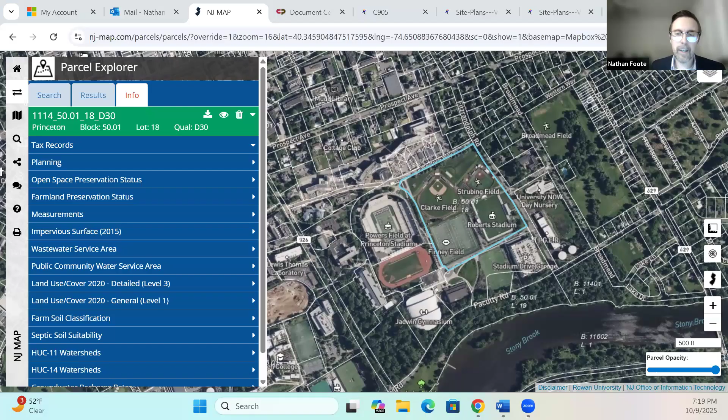So now turning to the previous applications, I'll zoom in a little bit to the site. The board has previously heard two applications related to the northern half of the subject property, the area occupied in this image by the baseball field to the west and the softball field to the east.

On February 14th, 2024, the university presented a concept plan to the board for a multi-phase project. During that hearing, the university's professionals indicated that phase one of that multi-phase project involved the demolition of the sports field and the installation of a geo-exchange field.

Phase two is construction of the Quantum Institute building, and that's the development application currently before the board that you're going to be hearing tonight. Phases 3 and 4 will be the computer engineering building and the aerospace engineering building. The university may talk about the phasing and timeline for those tonight, or not. But just for the board's awareness, that's the phasing plan that the university has presented previously.

So as noted, phase one of the multi-phase project involved demolition of the existing softball and baseball fields in this northern portion of the property, excavation of the site, and installation of underground geo-exchange wells and the associated geo-exchange piping. That was submitted to the board as an application. The site plan committee reviewed the application, classified it as a minor site plan, and recommended it for approval, which the board did. Final approval by municipal staff was granted November 14th, 2024.

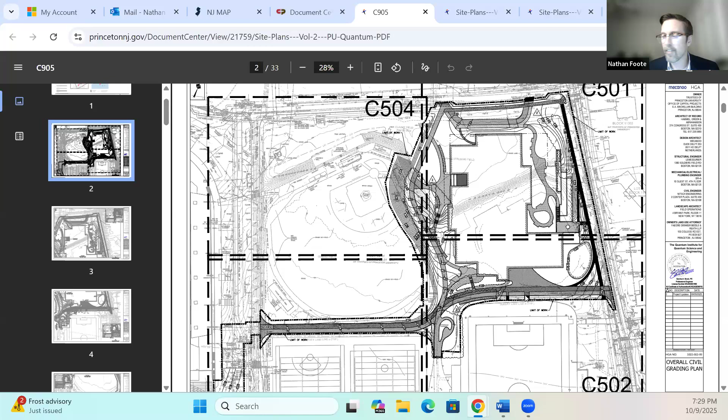And with that, I'll stop sharing, and that ends the summary of the application.

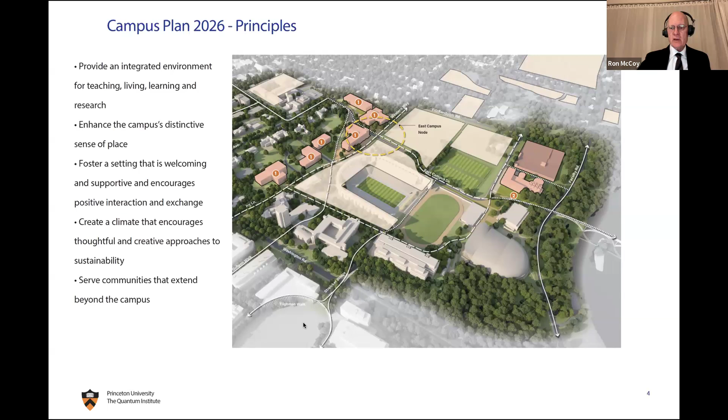Now we're on slide 5. This talks more specifically about the value proposition of the Quantum Institute project. The first bullet, as Christopher mentioned, is that this advances the GeoExchange goals of the university to achieve carbon neutrality by 2046.

We've learned that every time we have a construction project, we need to look at the site underneath as an opportunity for GeoExchange wells. On this project we have done that, and we are drilling the site beneath the project as a separate application for GeoExchange wells. There are some staff comments about whether those GeoExchange wells would interfere with the building. We'll get to those later, but the answer is no—that's a totally separate system. The laterals that connect the GeoExchange system are at the perimeter of the building and accessible, but the wells themselves are independent, and the building will not impact their functionality.

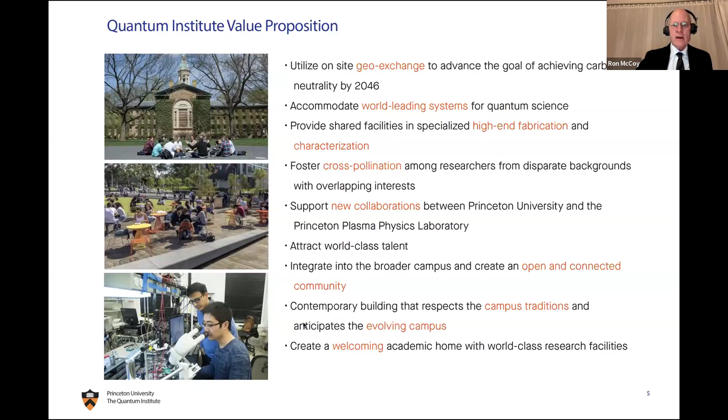All right, now we're on page 6. So now I'm going to tell you what quantum research is all about—but not being a quantum expert, I'm going to tell you what I read.

Princeton's quantum science and engineering efforts span foundational research and technological innovation. The Quantum Science and Engineering Graduate Program offers interdisciplinary training at the intersection of quantum physics and information technology, preparing students to be leaders in the emerging quantum industry. Princeton University has a deep legacy and a unique position in the field of quantum science. The quantum science journey at Princeton began in 1935 with Einstein, Podolsky, and Rosen's work on quantum entanglement theories. The university has since produced Nobel laureates and groundbreaking research. The Princeton Quantum Institute, also known as PQI, was launched.

Ron, could you explain the quantum theories of Einstein? What were they, entanglement? We'll get that later—that's a separate presentation.

The Quantum Institute initiative was launched in 2019, and it brings together 30 faculty from across the disciplines in physics, engineering, chemistry, computer science, and material science. This cohort of different researchers fosters collaboration across theory, experimentation, and application. The faculty are pioneering in quantum computing, architectures, quantum-grade materials, long-distance computing communication systems, and other emerging technologies and research.

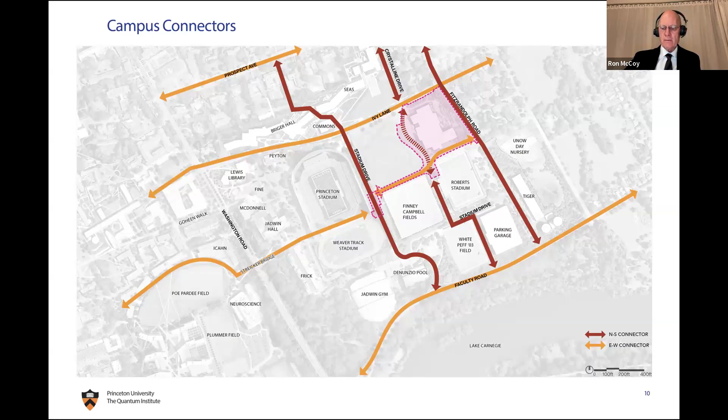We're not doing that at this time because we know we have future construction ahead of us, and that street will be destroyed with the future construction. So when those future projects are complete, that's when we will complete the shared shoulders along the complete street, which is Ivy Lane. I just want to say that the north-south connector is a pedestrian walkway that connects down to Faculty Road. All right, now we're on slide 11.

This one talks about the vehicular circulation in this area of campus. As you can see, around the site, the vehicular access only goes on the connecting road between Stadium Drive and Fitzrandolph Road. We call that a campus walk. It's a campus walk that's used by service vehicles and also by vehicles that need to access the loading dock. This is very typical on campus, that we have these kinds of shared drives, campus walks that are used for access for service vehicles and for loading docks.

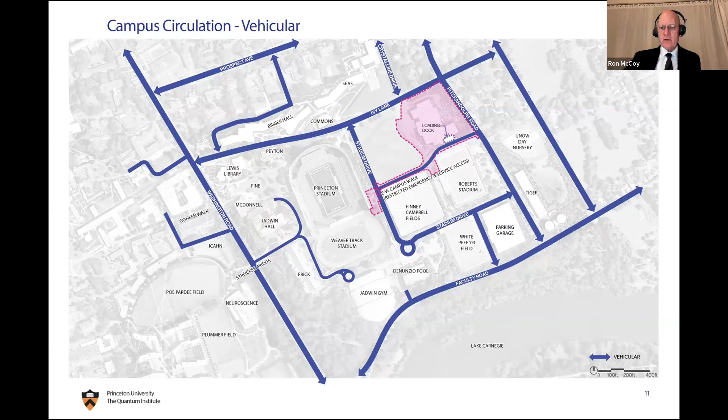Let me see if there's anything else I want to say about this one. All right, I'll get to the details now on the campus circulation.

This is drawing 12, showing the pedestrian circulation, with the more granular network of pedestrian paths that access the site. I mentioned earlier the tradition of campus walks serving as shared roads for access to loading docks and service. We have those commonly on campus: at Goheen Walk, on the walk between Icahn and Lewis Thomas Laboratory, accessing Whitman College, on the east side of the new residential colleges, and on McCosh Walk in the center of campus.

Traffic on those roads must yield to pedestrians, so pedestrians and bikes have the right of way. This addresses the comments made in planning board comment number 4 — that's a general comment about the use of that road.

However, planning board comment number 4 also asks us to clarify that the overall project is designed for 1,184 individuals and how they'll arrive to the building. Yes, it's sized for 1,184 occupants, and they will arrive via this network of pedestrian pathways. They'll park on campus in the overall system that Transportation and Parking Services manages, most likely in the new stadium garage, and use the pedestrian pathways to reach the building. There's no parking at the building.

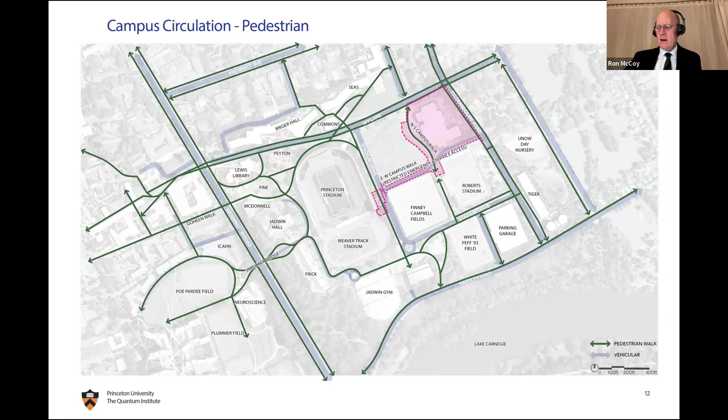All right, now slide 13. I'm going to use this slide to talk a bit more about several aspects of the questions and comments we received in the planning reports, in the staff reports.

Planning comment number 2 asks us to confirm the phasing and provide a timeline for future phases and the scales and dimensions of future buildings, and to clarify how the western portion of the site will be developed while awaiting those future buildings.

Let me address that first: the concept plan was a long-term vision. We do not have any specific target dates for construction of those facilities. We presented the concept plan to demonstrate that we're thinking about this building in the context of future campus development, but we've never put a time scale on that development. So whether it's a year or ten years, the site to the west of the Quantum Institute will be a temporary meadow, used for future academic buildings when we decide to launch those projects.

I'll also use this slide, which shows a bit of the floor plan, to address planning comment number 5, which asks us to clarify the proposed classroom functions of the building — specifically, will the labs on level A be used for lab classes or only for research, and will the auditorium on level 1 be used for undergraduate classes?

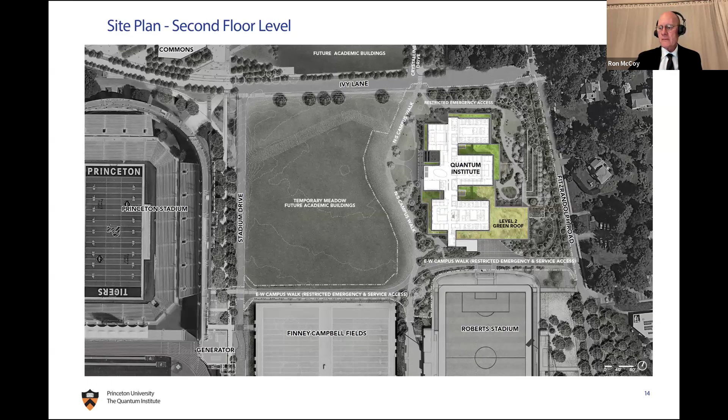All right, now slide 15.

I do want to point out there's one change in this slide from what we submitted yesterday or today. We've added an arrow here at the East-West Campus Walk, at the west end, just for clarification.

That's important because this East-West Campus Walk is two-directional for 95% of the uses. Only the large trucks that come about once a week, which cannot turn around in this loading dock, will head out to the east of the site and exit through a controlled gate, making a right-hand turn only when they hit Fitzrandolph Road. But service vehicles, small carts, and box trucks will be going both ways along that east-west campus walk, just as they do on the many campus walks I mentioned.

Emergency vehicles will have keyed access to that gate from Fitzrandolph, so they could either come via Stadium Drive from west to east, or come from Fitzrandolph from east to west.

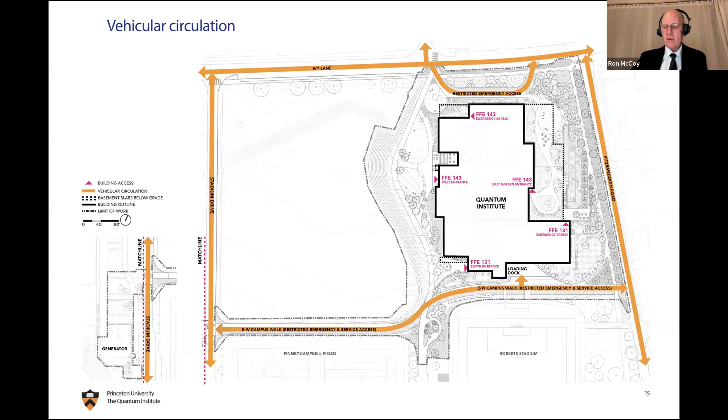Now I'm going to slide 16. This talks again about pedestrian circulation, and let me get to the comments here.

We were asked to address pedestrian safety in planning and engineering comment number 1. Pedestrian safety is, as on the rest of the campus, handled with these shared pathways—the east-west campus walks we have. They are sized in this new project at 12 feet or 8 feet typically to accommodate the kind of traffic, or 22 feet for the major one. The east-west campus walk is 22 feet wide. So these are sized to accommodate the kinds of traffic we anticipate, and they provide shared use paths that are safe throughout the campus.

I'll also point out on this slide, we'll talk about it more later, the drop of topography—you'll see the elevations shown here on this drawing. There is more than a 16-foot drop in topography from the northern side of the building to the southern side. You'll see a 12-foot drop in the finished floor elevations between the south entrance and the main entrance.

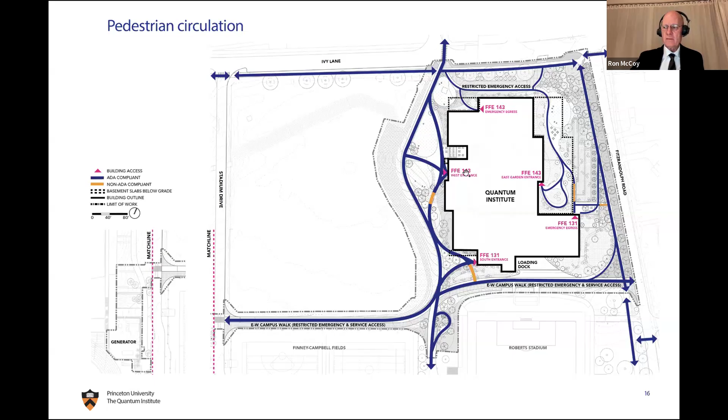Slide 17 here talks about bicycle circulation. As with the rest of the campus, the bikes and pedestrians will share the campus walks. As I just mentioned, the widths of the pathways are sized appropriate for this multimodal usage.

We have 88 bike parking racks provided, accommodating 176 bikes on the site. As noted earlier by Mr. Foote, they're primarily located on the western side where we expect all the arrivals to be. The quantity of bikes is extrapolated from our campus experience with buildings that have similar programs, similar ratios of laboratories, offices, student populations, and also the distance from the heart of the campus. We know that buildings further from the heart of the campus will have a bit more bicycle use than a building in the center of campus.

We're satisfying our bike requirements pursuant to Ordinance Section 10B-282.2D for institutions of higher education and learning. This is the applicable standard for this building since it's not a dormitory, and therefore interior bike parking, the distinction between long-term and short-term, is not required, and covered bike parking is not required. So that addresses planning comment 24, which asks us to address Ordinance 10B-282.2C—and as I said, that applies to dormitories, but not to academic buildings.

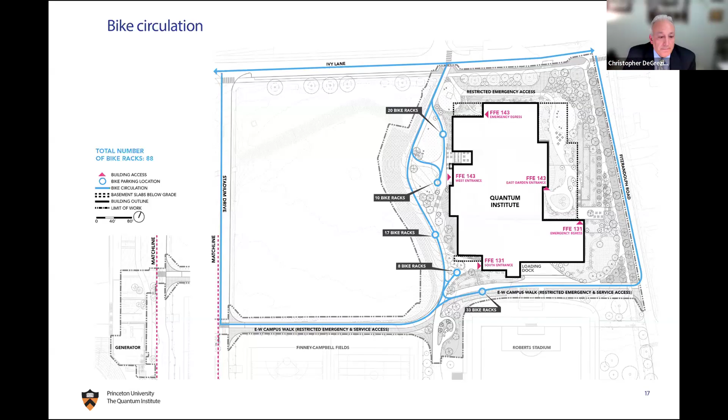All right, now on slide 18.

This addresses some of the comments I've already made about service and emergency access. It will be provided along that east-west campus walk at the southern side of the site, where we have widths of 22 feet using a 12-foot porous asphalt adjacent to a 10-foot wide grasscrete path. This is a strategy we've used at things like the new residential college, where we can provide footings for the outriggers of emergency vehicles along the pathway, but we can also plant grass and reduce the amount of impervious surface along that walkway.

That will continue from Stadium Drive all the way to Fitz-Randolph, and it'll bring vehicles to that loading dock, as I mentioned. And as I said, only once a week, longer trucks will need to go out through the eastern side. All other traffic will have to go out to the west to Stadium Drive, and that's obviously to prevent traffic from going into the neighborhood. And for those weekly trucks that do exit on Fitz-Randolph, they will be required to turn southbound, or turn right on Fitz-Randolph.

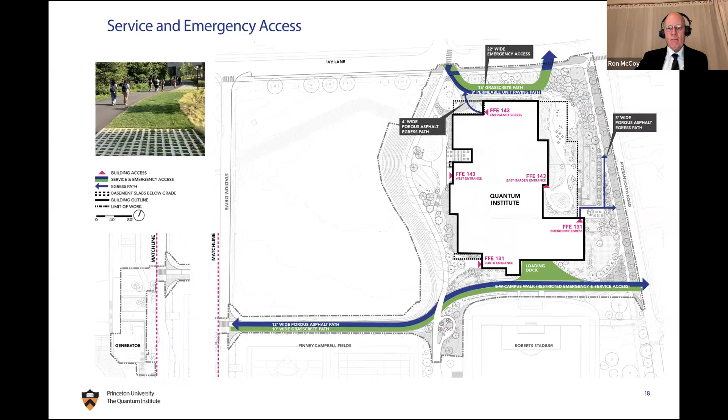This talks about site accessibility. As I mentioned a little while ago, there's a substantial slope across the site from north to south, about a little bit more than 16 feet. Thus, the main entrance at the west at 143 is a level above the entrance at the southwest corner of the site. And I should also use this drawing to indicate that a portion of level B below the building comes out to the perimeter of the building here.

So that's all under a green roof. So that green roof that I mentioned that serves as a setback to Fitz-Randolph -- part of that area has the laboratories underneath it.

The site, all the pathways on the site are fully accessible. There are indicated in orange here 2 areas on the west and 2 areas on the east that involve stairs and steps. But wherever there is a stair or step, there's a parallel or equivalent pathway for accessibility. So all the entrances at every corner, and this exit here at the east side, have accessible routes. On the east side, because of the stairs and the steep drop off to Fitz-Randolph, the pathways go to the north and connect to Ivy Lane.

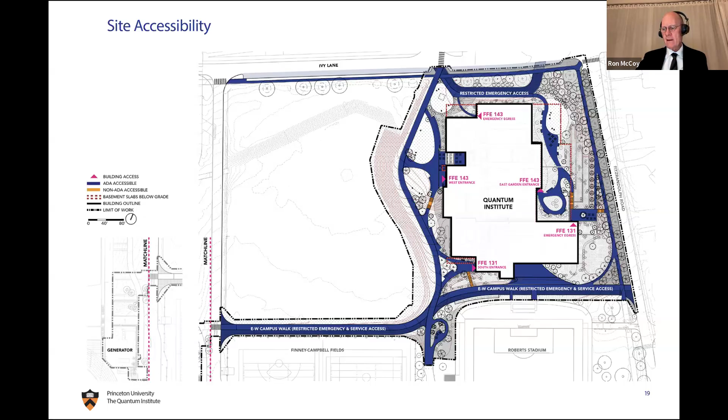All right, slide 20. I'm going to transition to Tsutomu here, who will talk about the landscape, but I just want to use this slide to introduce the landscape strategy, which is to recognize the different zones of the campus, different placemaking opportunities of the campus. And as Tsutomu goes through his slides, he will address everything here. So Tsutomu, why don't you take it away?

Just tell me when to change the slides. So Tsutomu, you were already sworn in, but we need to get you qualified.

Sure, so my name is Tsutomu Bessho. I'm a licensed landscape architect and director with Field Operations. We've been working on multiple projects with Princeton University over the past 7 years. I have a Bachelor of Agriculture from University of Tokyo and a Master of Landscape Architecture from the University of Pennsylvania. I've been practicing landscape architecture for over 19 years, and I'm registered in New Jersey and Pennsylvania.

And your New Jersey license is current. Yes. Thank you. We'd like you to present -- we accept your qualifications. Thank you.

So this is slide 20. As I mentioned, I will walk you through the places we are proposing around the building, including North-South Campus Walk, East-West Campus Walk, Woods, East Gardens, Structured Gardens, and Streetscape. Next.

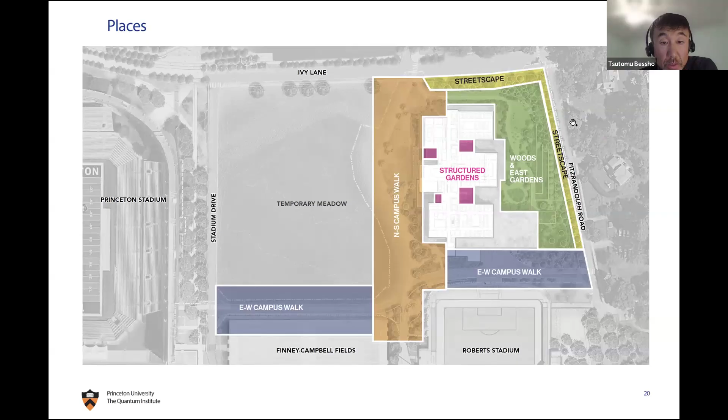Slide 21. So starting with the northwest corner of the building, we are proposing a series of lawn areas along the North-South Campus Walk to create the open and inviting landscape for the west entrance, which is a primary entrance to the proposed building. Next.

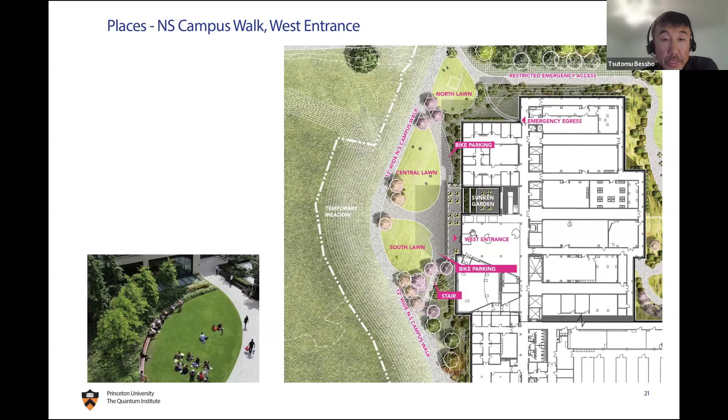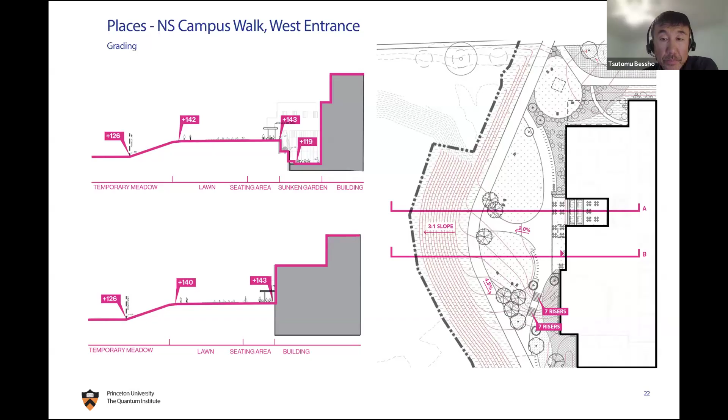We are also providing a good number of bike racks near the entrance where demand for bike parking is high. 30 bike racks in total are proposed for this entrance, and each rack will accept two bikes, correct? That's correct, so 60 bike parking spaces for this area.

I want to hand over to Ron to speak to the future campus art proposed at the corner of the building. Christopher, you may help us here. We have identified a hypothetical site for campus art. We have not selected that artwork, but we want to include it in the proposal in the application. Our strategy is to request that approval of the art be deferred to the landscape subcommittee later, or municipal staff.

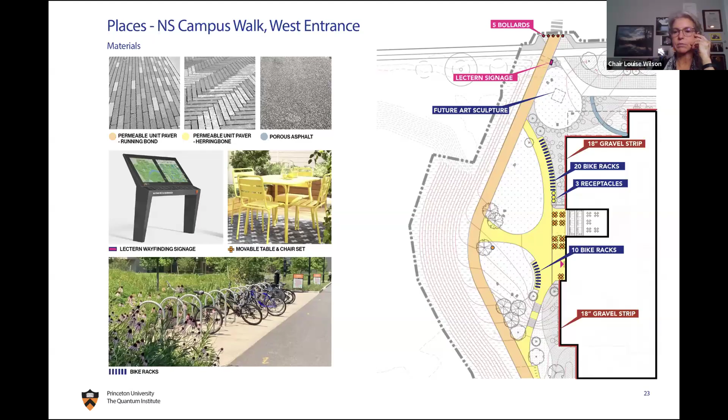The area west of the north-south campus walk, shown in orange, will be meadow, very similar to what we just planted at the Meadows campus in West Windsor. Lastly, an 18-inch wide gravel strip will be installed in the planting beds all around the building to address the new fire code.

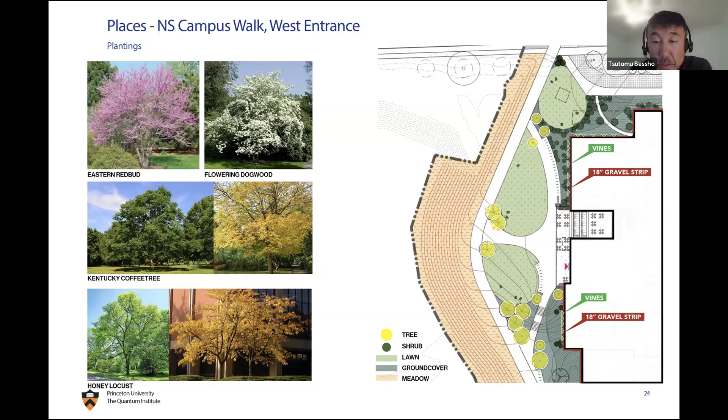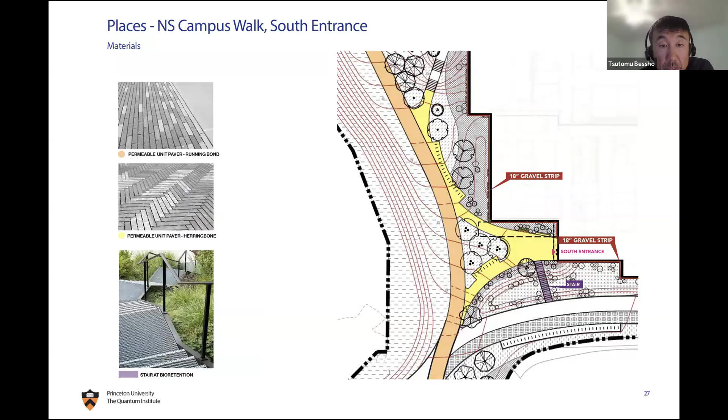Because that type of sign isn't really contemplated by the municipal ordinance, we're requesting a variance for it. A similar sign is on the north side as well—this one is on the south side of the path. As you follow the walk up, there's another one of those proposed to orient people and give them information on where they are and how to get to where they want to go.

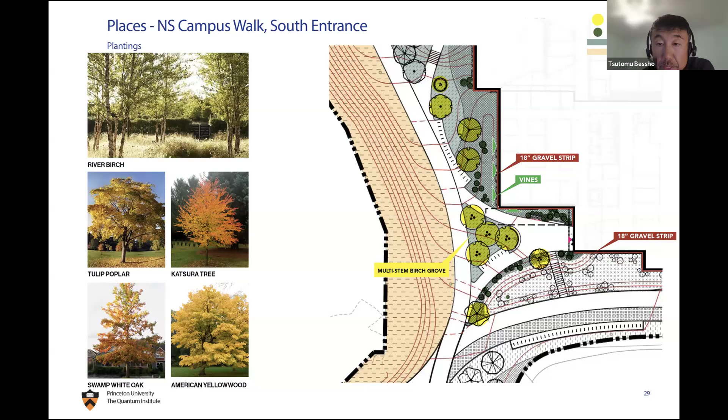Proposed planting: multi-trunk river birch trees are proposed to create the grove, and tulip poplar and katsura trees are proposed at key locations. Other proposed tree species include swamp white oak and American yellowwood. The planting beds are filled with shrubs and ground covers in the same way as the area to the north.

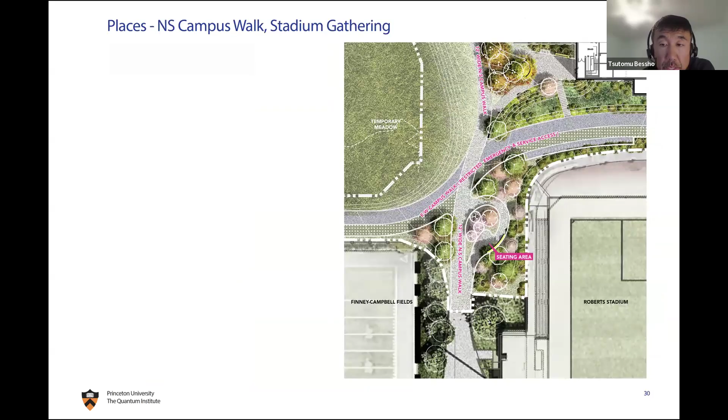This is slide 30. Moving further south, we are creating another small gathering space by reshaping the plaza built for Roberts Stadium.

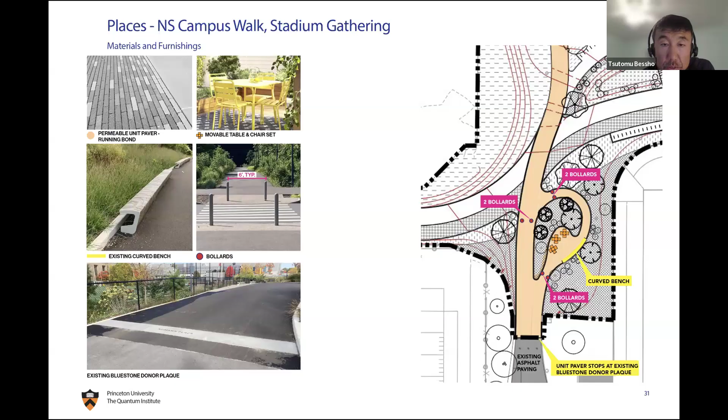Next, slide 33. I'll turn it over to Ron to talk about the East-West Campus Walk. We've talked about this a little already, but this responds to planning comment number 22, asking us to clarify if there will be a traffic restriction device at the southern access drive from Stadium Drive, referring to this intersection. The answer is no. As I pointed out earlier, there will be signage that says this is restricted access, because we need to get service vehicles and carts to the loading dock. With the exception of the large vehicle that comes weekly, everybody will also go out in that direction, so we don't imagine there'll be any functional benefit to having a restricted device at that intersection. It'll be more common on campus to have that open for vehicular traffic.

And then we have an exit-only gate here, as mentioned, and a right-turn-only southbound on Fitzrandolph to stay away from the neighbors.

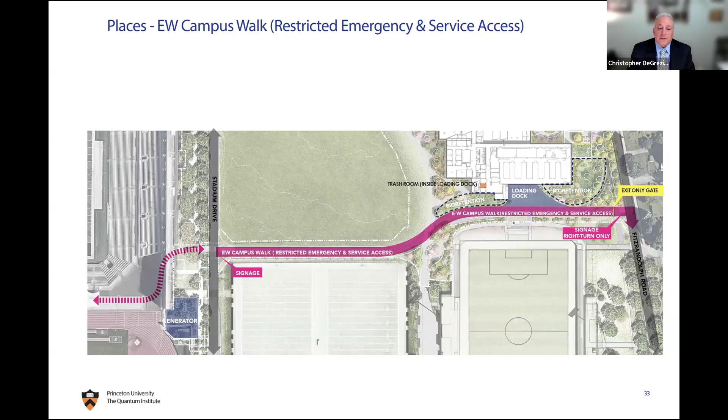The next slide, 34, proposed paving materials and furnishings for the East-West Campus Walk. The north half of the walk will be paved with porous asphalt shown in blue, and the south half will be paved with grasscrete shown in green. As Ron mentioned, grasscrete is basically concrete paving with voids that can be filled with either grass or gravel. We've used this material for a few projects on campus, and it's been very successful in reducing the scale of the hardscape. As Ron mentioned, a gate will be installed at the east end of the walk, and signage will be installed at the west end to control vehicular traffic at each location.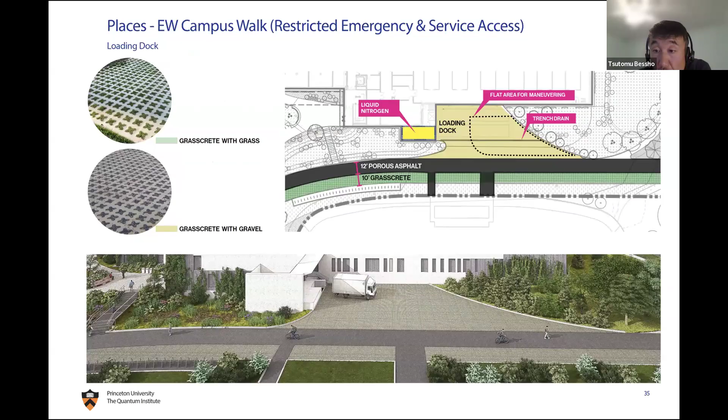Next, slide 37, zooming into 3 bioretention basins located between the building and the East-West Campus Walk. As previously mentioned, there will be 1 basin at the southwest corner of the building, and 2 more bioretention basins at the southeast corner with 2 different levels as shown in the section. These 2 basins are more visible to the public, so they bring a great opportunity to showcase what the university is doing for stormwater management.

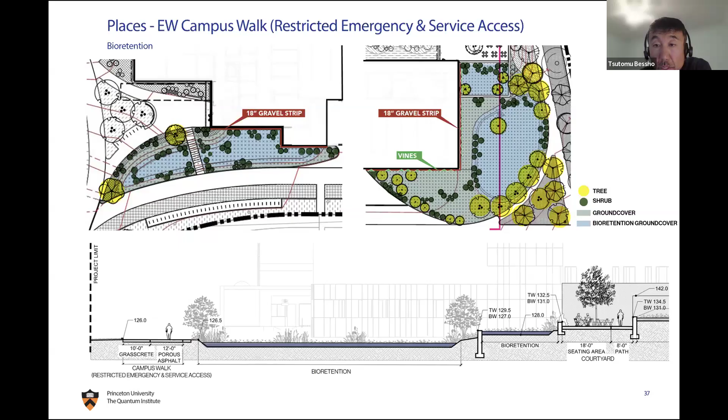Next, slide 39. Moving on to the east side of the building, this area contains various types of landscapes, including terrace, courtyard, grove, and woods, along with level changes, so it will be a very interesting space to walk through as well as to look at from the street level.

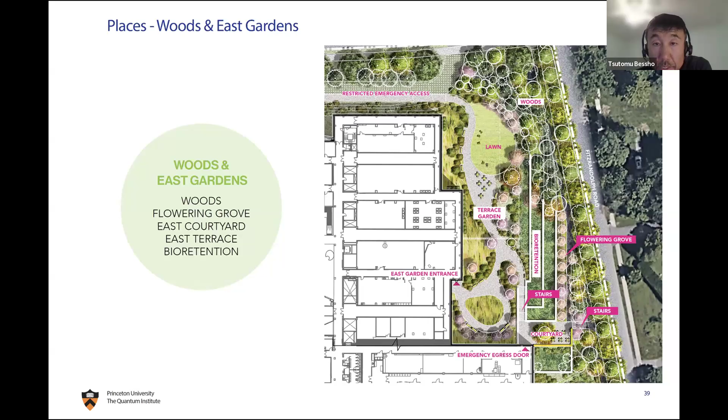The next slide, 40, shows the east-west sections illustrating the level changes in this area. As you can see, the terrace is basically the green roofs, as Ron said, and the terrace in front of the building is at a higher elevation than the street level. There will be a terraced bioretention basin between these 2 spaces.

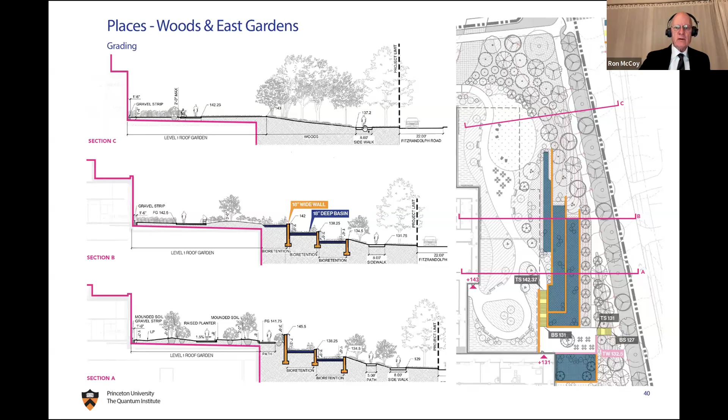Let me point out, as may be clear in this section, that this fuchsia colored line is the roof of the building below, the laboratories below. You see the green roof here, and then it terraces down to the Fitz-Randolph Road and the walkway sidewalk. It's continuous when you're on the ground, so you don't realize the building is there—just the building underneath the garden.

Slide 42, proposed planting. This area will have various types of planting, including canopy trees, understory trees, and shrubs to create woods at the northeast corner of the site, flowering trees for the grove along the terrace bioretention basins, and a symbol tree for the courtyard at the southeast corner. This tree is the Katsura tree, one of the non-native species we are specifying. The bioretention basins will be densely planted with shrubs and ground covers.

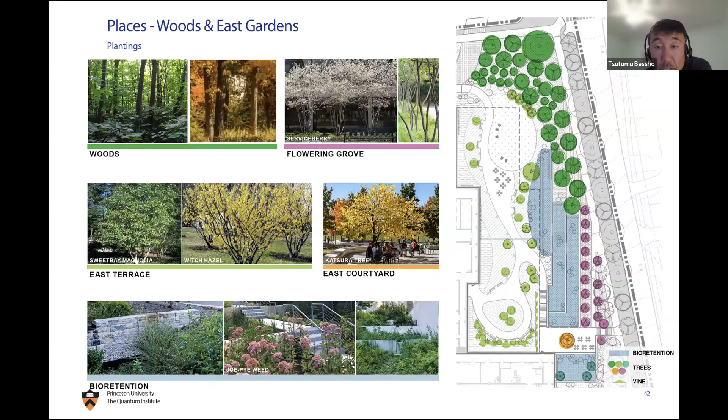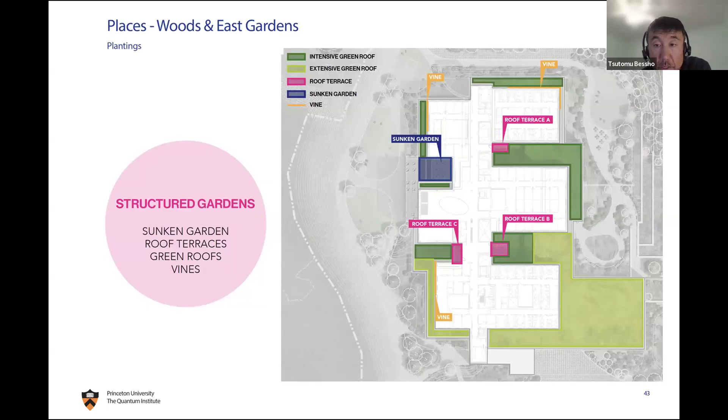Slide 43. Now we are moving on to the places integrated into the building. We call them structured gardens, including the sunken garden we discussed, roof terraces, green roofs, and vine planting for the building facade.

Slide 44. First, the sunken garden located just north of the west entrance. This is a section cutting through the garden, showing space to occupy on the right-hand side, and two raised planting beds on the left-hand side at the upper level. These planting beds are meant to mitigate the scale of the tall wall between the upper and lower levels. The scheme shown here is what we documented in the municipal submission.

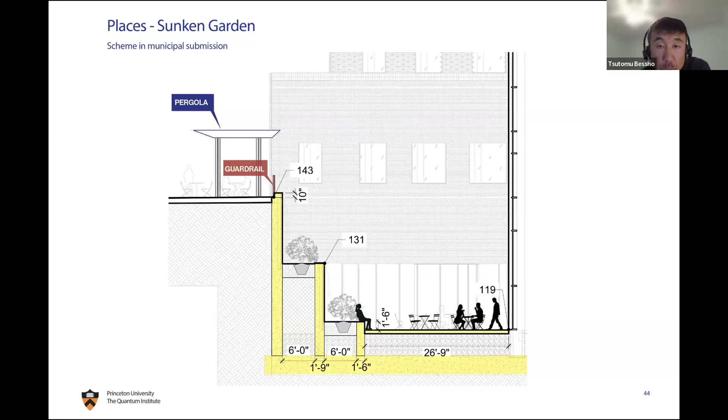We are also specifying English ivy to cover the wall, which is not native and considered invasive, as pointed out in reports from the town, specifically comment number 4 in the landscape architect's report, and one of the comments in the shade tree committee's report. However, this sunken garden is very contained - you saw the very tall wall there and it's heavily shaded - so we believe it is less likely that the vine will spread out from the space.

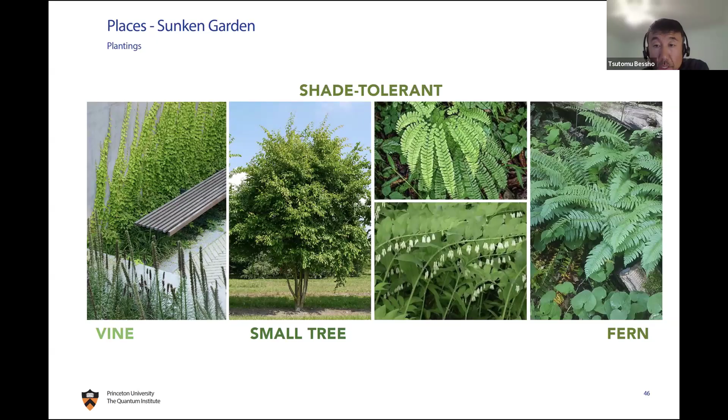Slide 47. Now we are on the roofs. We are covering a substantial area with vegetation, both intensive green roofs shown in dark green and extensive green roofs shown in light green. The areas highlighted with the magenta box, three of them, are the roof terraces we are proposing.

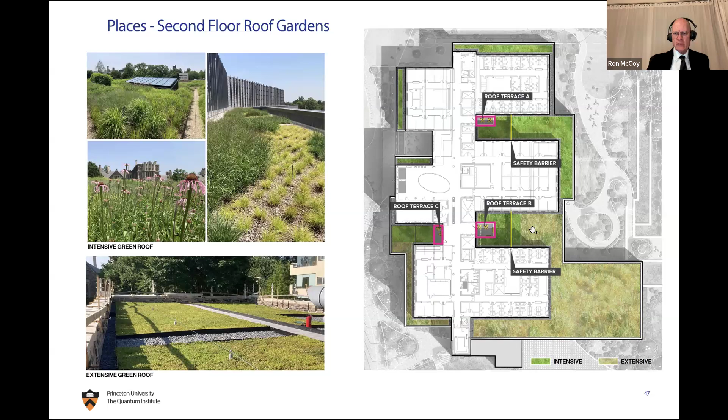Let me point out this yellow line, which is an additional restriction barrier, so that if someone leaves the building to access that roof terrace to enjoy being out in nature, we want to prevent them from walking across the roof and getting near the edge. This barrier prevents people from going further toward the perimeter of the building.

Slide 48, showing one of the three terraces we just discussed. The terrace will be paved with paver and bounded by a concrete wall with a bench seat top. It's a very small space, but it can provide users with the opportunity to get outside and enjoy fresh air when they don't have time to go downstairs.

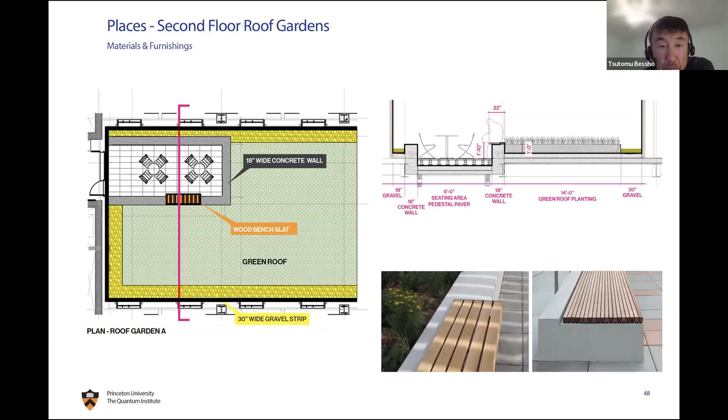Slide 49, moving on to the vine planting for the building facade. The vine is a very important design element of the building facade, and we are proposing it essentially for all building faces.

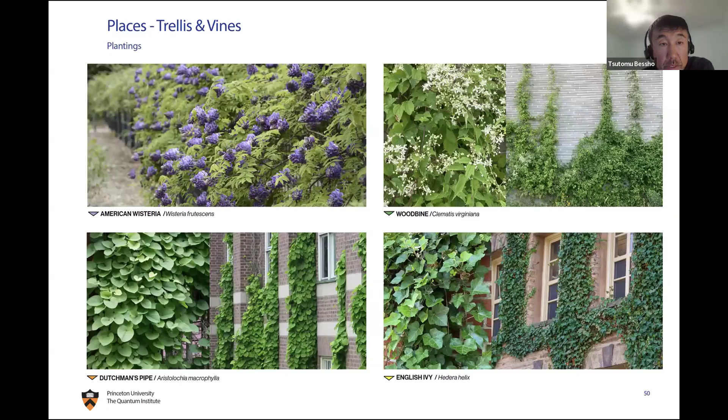Slide 50. We are proposing four different vine species. As I mentioned, one of them is English ivy, but the other three species are native, including American wisteria, clematis, and Dutchman's pipe.

Slide 51 shows the building elevations with the vine planting highlighted in green. As you can see, it is integrated into the facade design, enhancing the articulation of the building facade.

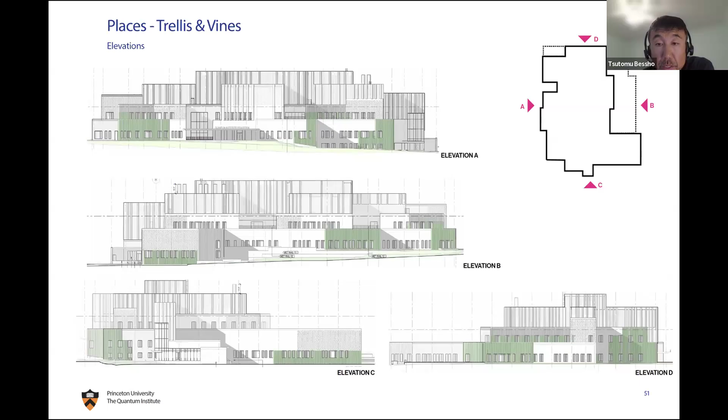Slide 52 moves on to the streetscape on Ivy Lane in the north and Fitzrandolph Road in the east. We are proposing to create landscapes with shade and seasonal interest.

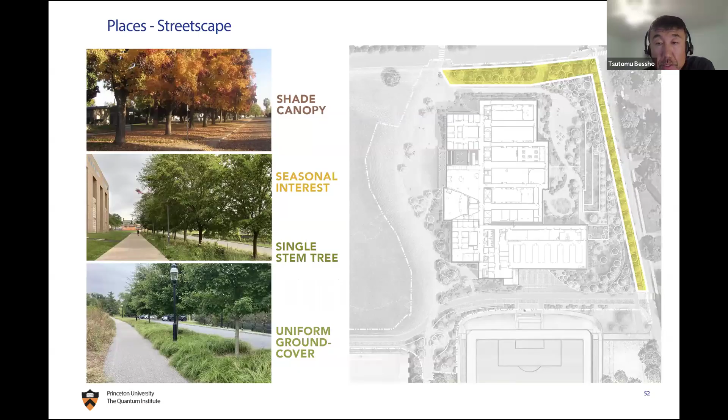Slide 53 shows proposed paving materials and furnishings for the streetscape. The fire lane north of the building will be paved with grasscrete, shown in green, and the sidewalk on Ivy Lane will be cast-in-place concrete, shown in orange, continuing the sidewalk to the west. The sidewalk on Fitzrandolph will be porous asphalt, shown in blue. Bollards are proposed at each curb cut on Ivy Lane to restrict vehicular access to the fire lane.

Slide 54 talks about the existing trees we are preserving. They are large and mature, and we understand the board's landscape architect raised a concern about preserving 2 Norway maples on Ivy Lane, since they are in fact an invasive species—that's comment number 2 in his report. We recognize the concern but would like to keep them because they provide much needed shade for pedestrians and have presence while the newly planted trees grow, which takes some time.

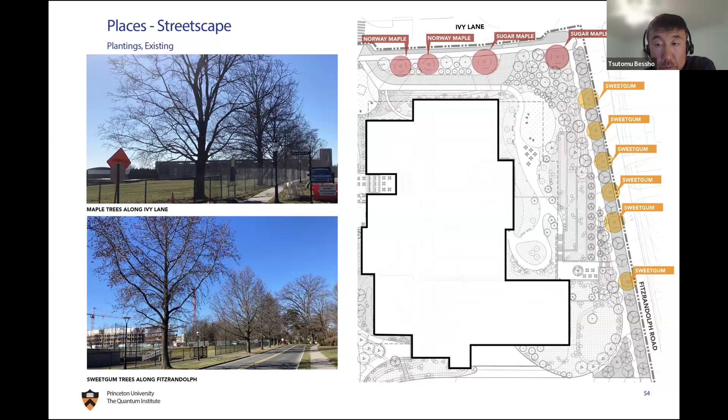Slide 55 shows proposed tree planting. The proposed canopy trees are shown in dark green, proposed understory trees are in yellow, and existing trees are in light green. We have a few on Ivy Lane. For the trees on Fitzrandolph Road, we originally proposed all canopy trees as shown here, but realized there isn't much room for new canopy trees because of the size of the existing trees that remain, so we made minor adjustments. The scheme shown here is the original scheme documented in the municipal submission.

Slide 56 shows the revised current tree planting scheme. As you can see, we replaced some of the proposed canopy trees on Fitzrandolph Road with understory trees, shown in yellow. We believe this works better from a design standpoint, since these understory trees help make the streetscape more diverse with a layered effect.

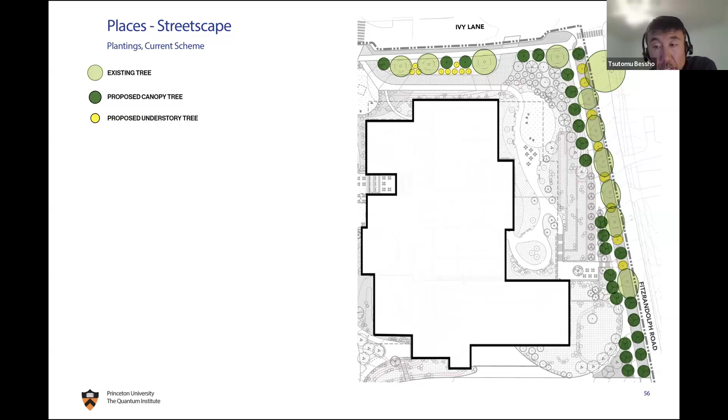There were also two typos in the presentation we shared with the town on Tuesday, so I will correct those as well. We are preserving 22 existing trees, not 24 as shown in the previously shared presentation, and removing 48 trees. Three trees have already been removed because of their health conditions. 34, not 33, out of the 51 trees are larger than 8-inch DBH, which require tree replacement. Per the ordinance, 45 tree replacements are required for those 34 trees to be removed or that have already been removed.

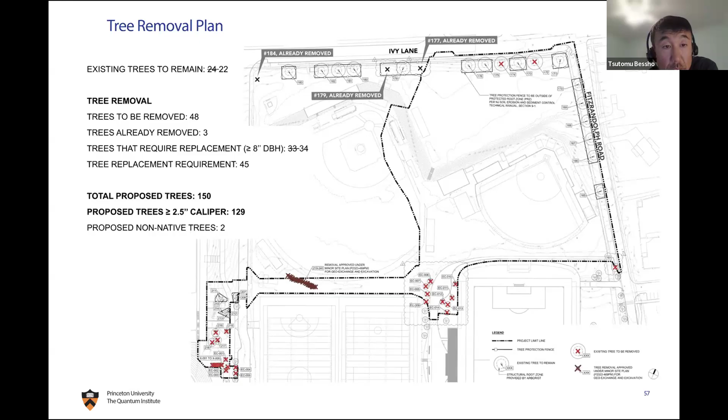We understand the use of non-native species was pointed out in the landscape architect's report, comment number 3, and mentioned in the environmental commission's report. However, they are part of the important landscape design elements, so we would like to keep them in the design, given that we are planting much more than required by the ordinance, and the Katsura trees are not technically considered an invasive species. This slide has also been updated from the earlier deck submitted—yes, two numbers were corrected in these two slides.

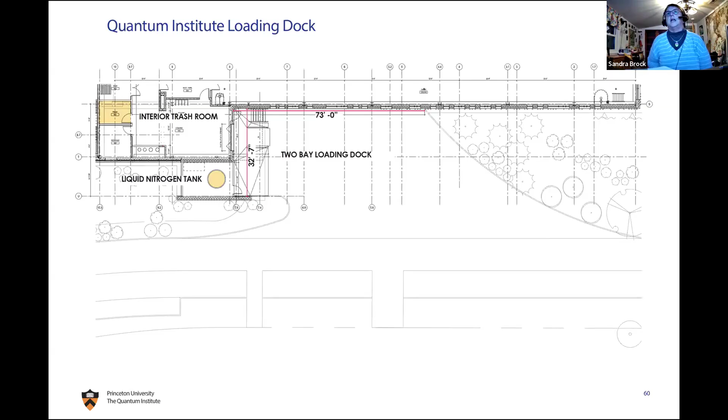All right, I'll just start with slide number 60, which shows the dimensions of the 2-bay loading dock. This is in response to several comments related to the loading dock, including planning comments number 20 and site plan comments number 8 and 9. So the next 3 slides will be responding to those comments.

If I can jump in here, I also want to say that there have been several comments about the interior trash room and the waste management program. In response to planning comment number 20, which asks us to confirm the adequacy of the trash storage given the size of the building, commenting that it's relatively small, and to talk about how that is going to be managed and operated.

The response is that our trash collection is managed by the University Building Services, and the capacity of all trash storage in the building is coordinated with the waste handling schedule. We realize that a smaller interior trash room will need to be managed and serviced more often, but that's the kind of total scheme we're initiating on this project. So the point is that the size of the trash room is in sync with the operational plan to manage it.

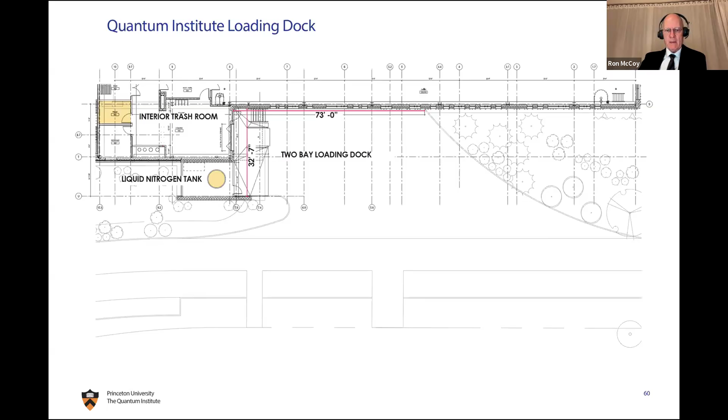Shall I go forward, Sandy? Yes, please. So what I'll be doing is going through some turning movements for the different vehicles that will be accessing this loading dock. We'll start with the turning movements for Kubota tractors.

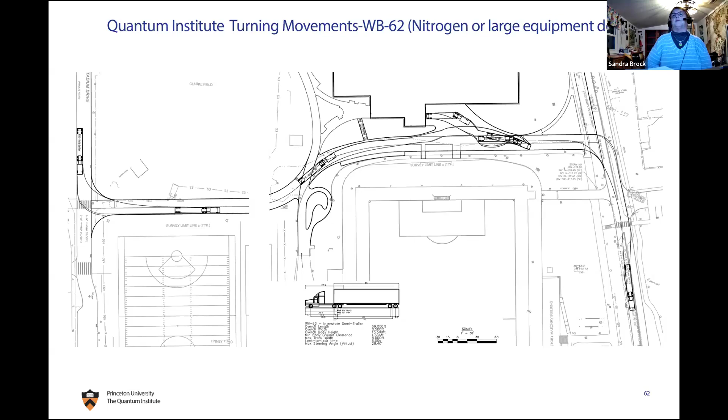These are the turning movements that were requested. I also want to make sure you're aware that turning movements were submitted for all the fire trucks for the different access points of the building. That happens to be on sheet C705, but this is addressing the loading dock specifically. So I think we can move on to the next slide.

Before we do that, let me say that there are other staff report comments that the testimony Sandy and I have given should satisfy. I'm not going to read them all in detail because they all talk about the same issue of the dock sizes, turning radii, and the size of the trash room. But planning comment number 25, site plan comment number 7, and site plan comment number 9 all relate to these topics we've just given testimony on.

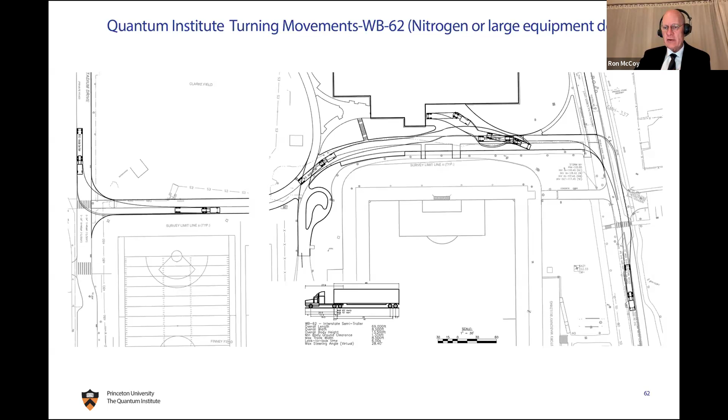You've already seen some sections previously presented that show the bioretention basins on the east side of the building. I'll be going through these sections again, but my presentation will show you how the stormwater systems are integrated into those landscape plans.

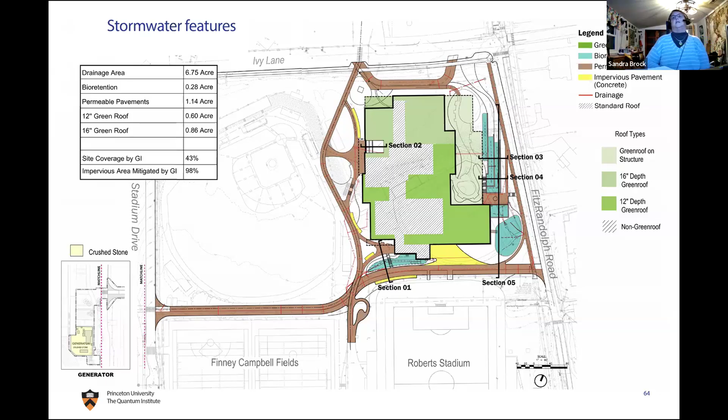Before we do, let me add one comment here: I believe the testimony I'm about to give satisfies response to planning comment number 27, which asked us to confirm that future phases of the project will provide additional stormwater management. The answer is yes. We were very careful during the concept design phase to make sure those future projects would have enough site capacity to handle the stormwater requirements they would be required to manage. So even though we haven't designed the buildings, that's a requirement we've given ourselves for those buildings.

Correct. It was very intentional based on where our limit of stormwater systems were, to make sure there was ample space and location for any future buildings being developed.

So this first section is section 1, on the southwest corner of the building. This shows bioretention basin 6, but it also shows the section that goes up through some of the walkways and entrance plazas, and through the campus walkway, showing how all of the systems are integrated into what you've already seen in the landscape.

Starting with the porous pavers, there will be subsurface storage underneath those pavers, which help mitigate any increase based on the proposed development. Bioretention 6 is also heavily planted, yet it contains additional storage beneath the bioretention basin.

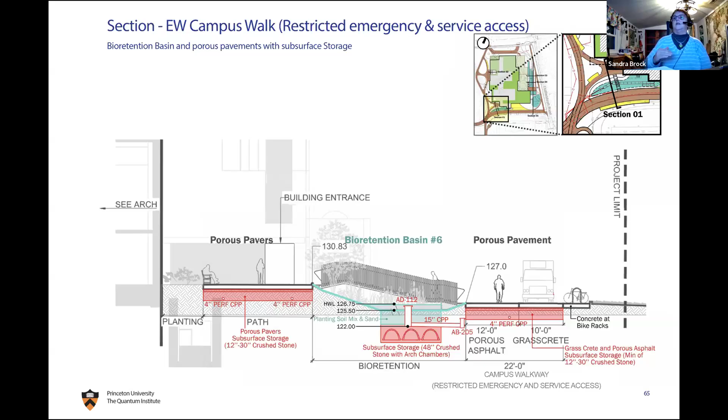If we move to the next slide, this was already previously discussed, which is the sunken garden. From a drainage perspective, and from Princeton's perspective, one of the key items of this is an isolated area that is lower than the surrounding areas.

This is showing the section of it, which shows there'll be a porous system on the plaza deck. There'll be a series of underdrains underneath that plaza, that little sitting area, that will be brought out into the drainage system. In addition, there is a separate trench drain system that will also be brought out. This is a redundant system, and this has to do with the configuration of this location, making sure there is redundancy so there's no issues if any of the system fails.

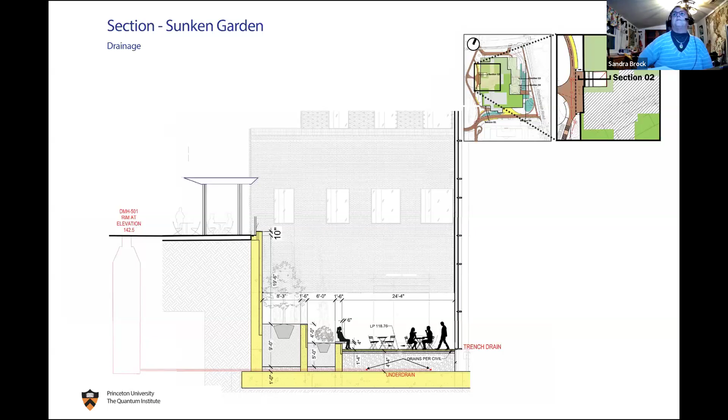And if we go on to the next section—so this is when it gets fun, this is my area here. When we get over to the east side, it's really nice to see how the landscape is working, but how we've integrated all the stormwater in it.

That comes from the stormwater from all the green roofs on the building itself into the actual bioretention. This is a step bioretention system, so each basin steps into the next one. There is an underdrain, a perforated pipe, in each one of those bioretention basins.

If you have an extreme storm, there are overflows set in. Each one has an overflow so that basin 1 will overflow to basin 2, basin 2 will overflow to basin 3. So there's a series of steps there.

So on the next section, that was slide 68—sorry, we're on 69 now. If you go back one slide, this is showing bioretention 2 and 3, but it's also showing the connection to the existing drain, the 30-inch HDPE that goes down Fitz-Randolph. We go to the next slide.

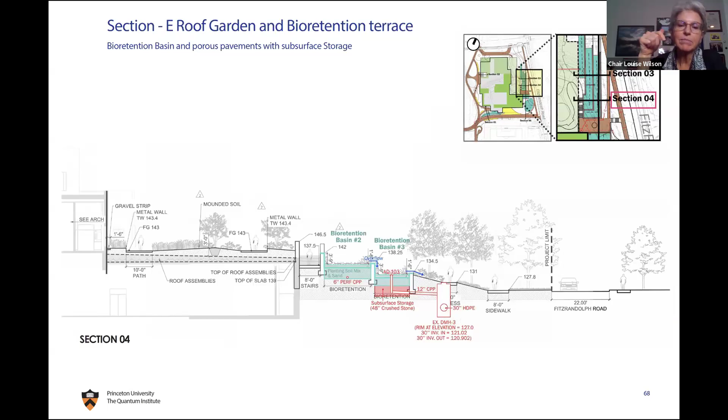Quick question: does that third overflow redundancy pipe connect to one of your really huge underground storage systems, or does it connect to the storm sewer and basically go straight to Lake Carnegie?

It enters option 3. Yeah, it's option 3. It goes into the Fitz-Randolph Road drainage system. Eventually there is an existing 30-inch drain that connects into Fitz-Randolph, then, yes, goes all the way down to the lake.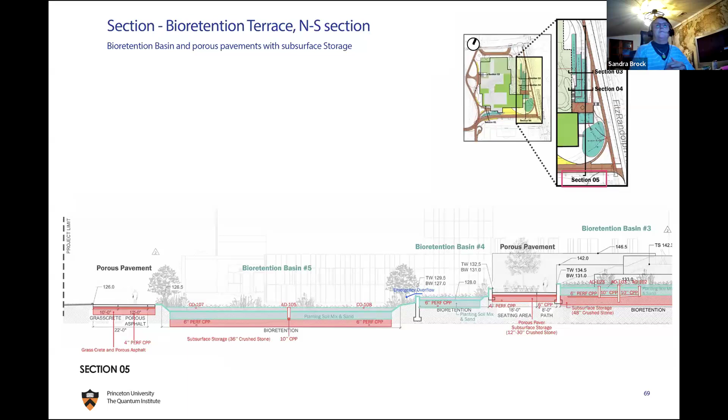There we go. Okay, thank you, Sandy. That was very interesting, good stuff. Now we're going to talk, I'm on slide 70, and I'm going to talk a bit about sustainability.

This diagram describes some of the variety of sustainability objectives for the project. At the bottom, the project is designed to be LEED Gold, and we have set a university target of at least 20% embodied carbon reduction and energy reductions. The project will be connected to the GeoExchange system, and all rooftops will be designed to be solar ready. The GeoExchange system is part of our campus goal to achieve carbon neutrality by 2046, and it's beneath level B, the sub-basement, independent from the building.

The laterals that the GeoExchange system feeds, and may need maintenance, are located at the perimeter of the building and can be accessed. Picking up on the comments that Sandy and Stone have provided, I want to talk about the robust native landscape and biodiversity corridors. This building, particularly on the east side, is really trying to enhance the biodiversity along Fitzrandolph and draw up the woodlands from Lake Carnegie into this edge of the neighborhood and into this edge of the site.

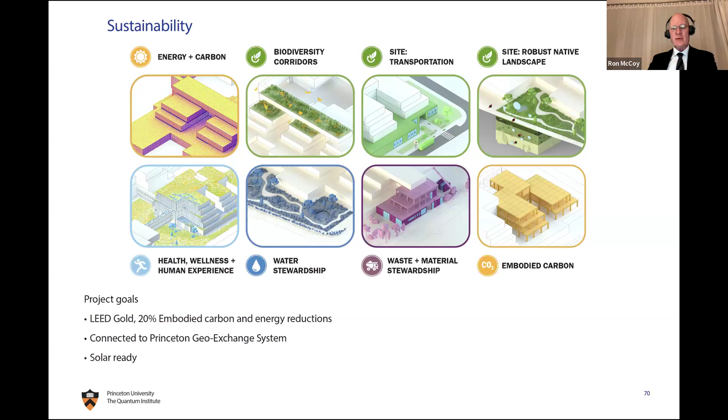Again picking up on Sandy's comments, this has been one of the most robust efforts to design a building from a stormwater management plan first. We considered the stormwater management first, then designed the building to accommodate that, as opposed to designing a building and then trying to fit the stormwater management into the design.

Slide 71 gives a bit more detail on the embodied carbon reduction and sustainability goals. You'll see the diagram on the right of the baseline building, the GWP, global warming potential, by design case. On the right, the optimizations we've found primarily in the superstructure steel and metals, the superstructure concrete, substructure steel and metals, and the substructure concrete. All of those systems are contributing to the embodied carbon goal, and we're designed to hit a 23% reduction in the embodied carbon of the building.

This also helps address the question about mass timber. I want to say that this building is highly sensitive to vibration, and mass timber is not viable for this particular project because of that vibration requirement. So we're really looking at every other alternative way to get to lower embodied carbon through these technologies I've just identified.

Let me just check one thing here. Another comment is planning board comment number 12, asking why the building is being designed to be solar ready as opposed to providing solar panels on the building when it's constructed, noting that if feasible, solar panels should be provided immediately after construction.

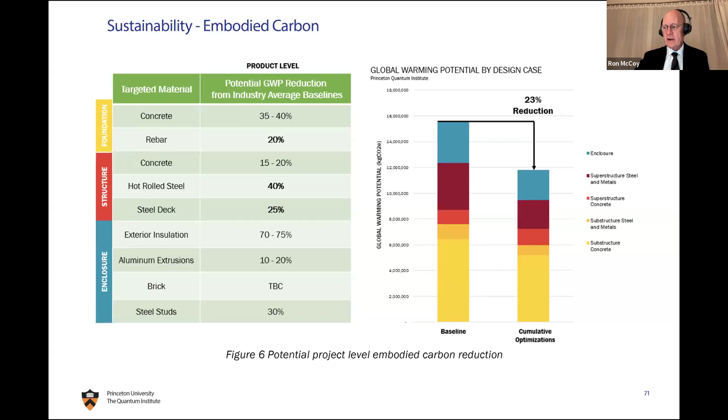Rather than do one building at a time, we'll get better benefit if we do them as a kind of strategic plan, looking at the entire inventory of projects and choosing those most viable for solar. So we're not providing it day one, we're making it solar ready, but not providing solar from day one. Now on slide 72, I'm going to transition to the exterior materials and character of the building.

So I mentioned stormwater was one of the first strategies to design the building. That was at the same time as designing the building to meet these zoning requirements, and to enhance and break down the massing of the building to make it a smaller scale building.

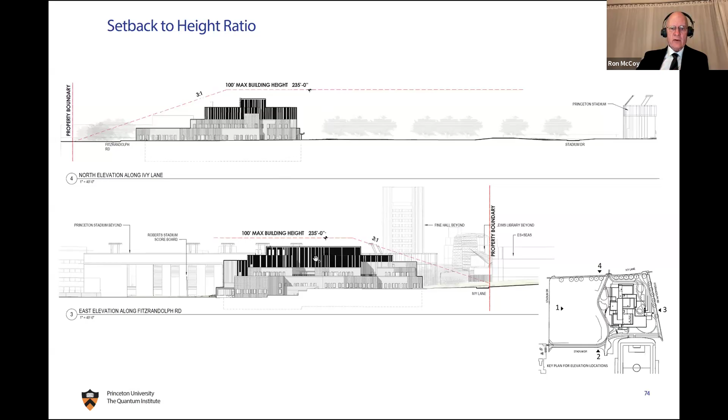You'll also see the very purposeful and careful strategy to bring planting and vines into the building. We still maintain a list of all the vines that Beatrix Farrand used on campus, and the tradition of incorporating vines and plantings on buildings is very rich at Princeton, creating a more humane and intimate character for the campus. They're carefully designated in particular parts of the building and coordinated with our building management and grounds and operations folks for maintenance.

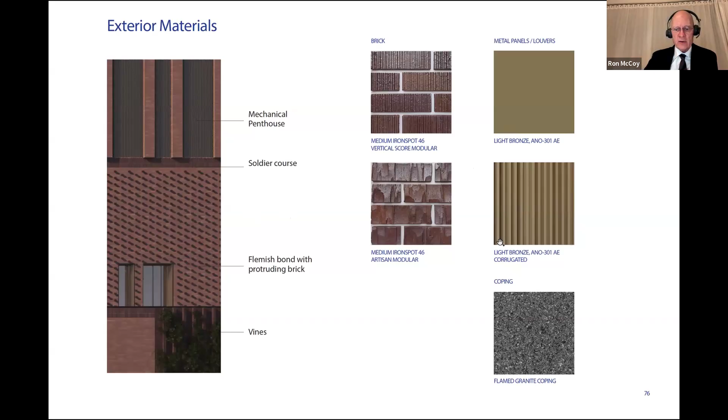On the left, you see an example of the variety of brick strategies that bring a sense of craft and richness of material to the building. The mechanical penthouse is integrated with the mass of the building through those vertical columns of bricks. You'll see the soldier course, and the Flemish bond brick with protruding bricks, and at the bottom a diagram of vines. This is the vocabulary that will be used, not on 100% of the facade, but throughout the building. On the right, you see the accent colors: the metal panels for the louvers, the light bronze colored corrugated panel at the penthouse, and a flamed granite coping.

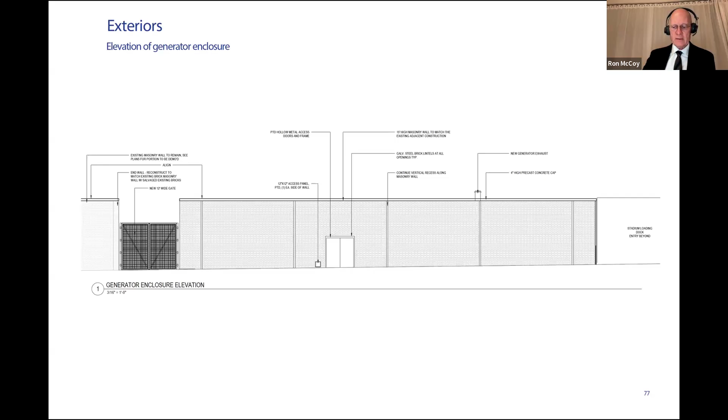On slide 77, now we're over at the generator enclosure. The generator enclosure is very modest. It simply picks up on it's a brick facade, a brick wall that uses the same brick on the existing generator enclosure.

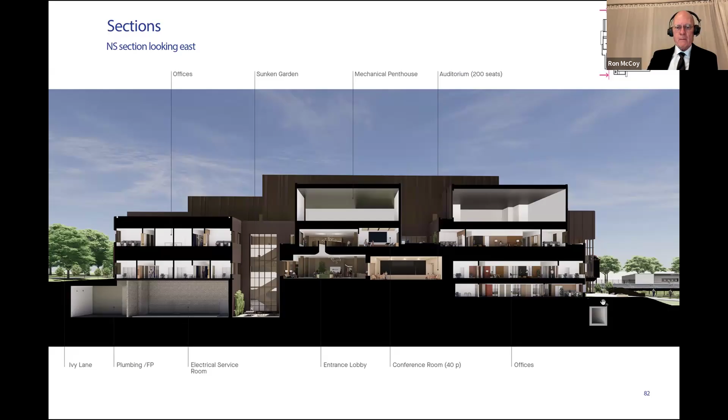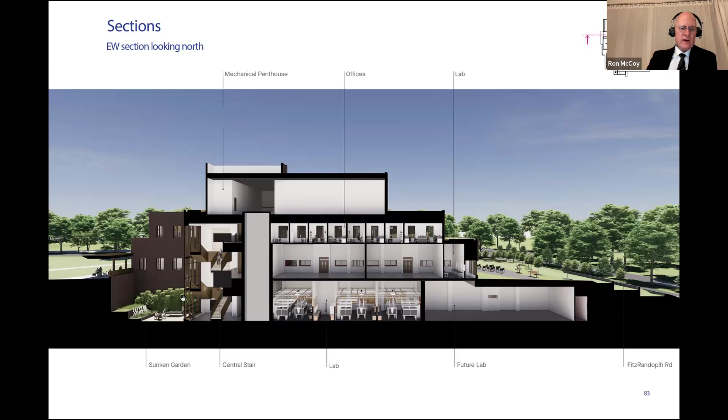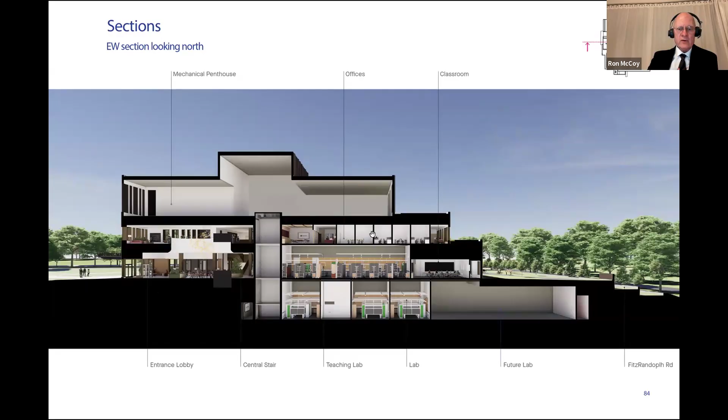Now on 84, taking again a section looking to the north. Now we're taking a section through the entry lobby, which has a 2-story space. It connects to the second floor, which is surrounded by a faculty conference room and gives access to those neighborhoods of offices for faculty and graduate students at level 2. And level 1 and the level below are the laboratories.

Now we're going to have Joe come in and talk about acoustics, but Joe needs to present his credentials.

Great, and we'll thank you, at slide 86. Thank you, Ron. Joe Horesco. I have a Bachelor of Science in Mechanical Engineering from the University of Hartford with a concentration in acoustics. I've been practicing since 1999, so 26 years or so. And I'm a principal with Acentech, and I am board certified with the Institute of Noise Control Engineering. We accept your qualifications. Thank you.

The software that we use is called CADNA. It's a well-vetted software that uses international algorithms in acoustics, so it follows standards.

The inputs in the model include building height and geometries, the topography of the site, and then the big picture is the sound levels from the mechanical equipment.